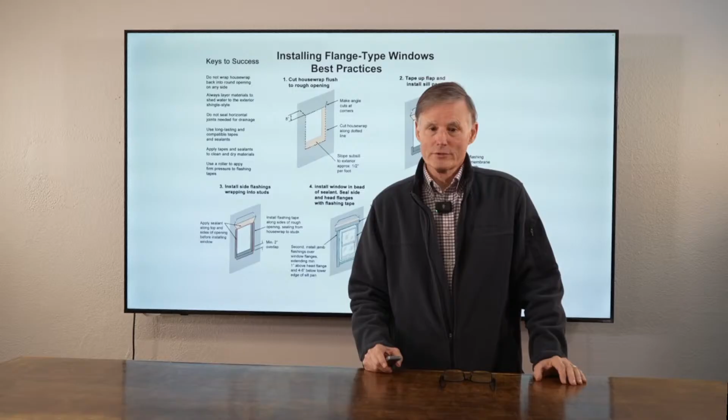This is a 5-step process for installing flange-type windows, which are the kind of windows you use when you have metal siding. The thing is, this is why it's good to go with a company that has lots of experience, because nobody likes leaky windows. If windows are not flashed properly, whenever you have vinyl and especially metal, they will leak when you get hard rains unless you flash it properly.

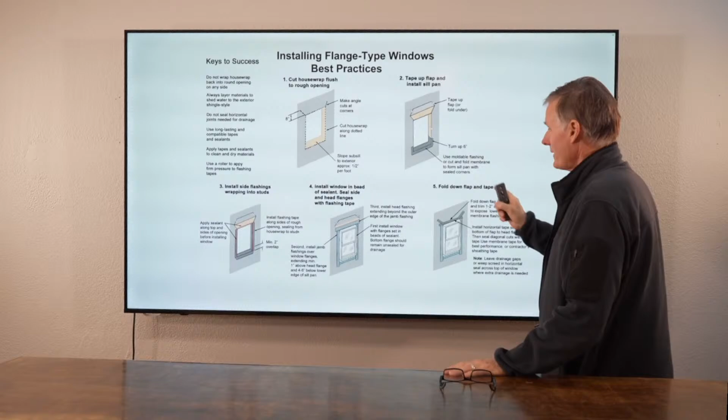So we follow - I'm not saying that we follow these 5 steps to the T, but we have a method that has been developed over years and years, and that's what we use. That's how we flash these windows. So that's the first one.

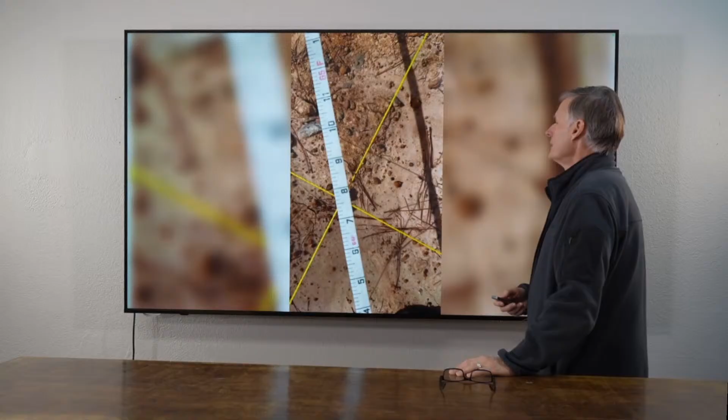What's that? Now here's the second one. What's that? You look at this photo and you see some string, and you see a measurement of 64 feet, 7.5 inches. Then you see the tape coming from another way, and it's 64 feet, 7.5 inches. So what is that?

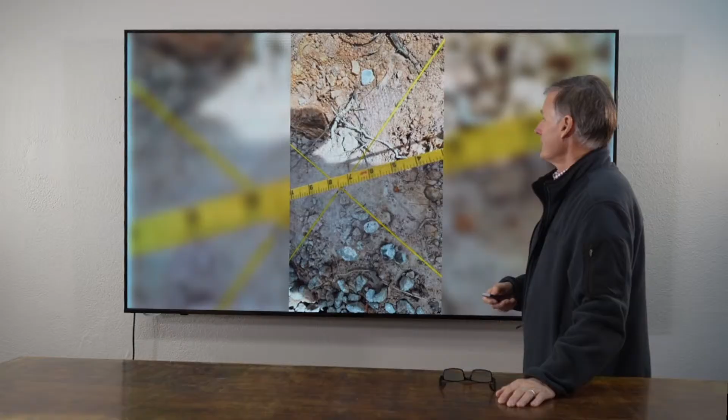Well, that is confirming the overall structure squareness. A lot of you guys that watch this program are very familiar with that, but if you're not - you have to get the building square. It has to be square, because if it's out of square, you will eventually see that in the construction process, particularly when we have our trusses spaced at 5 foot on center. If the building is out of square, that last truss is going to be crooked. It's going to show.

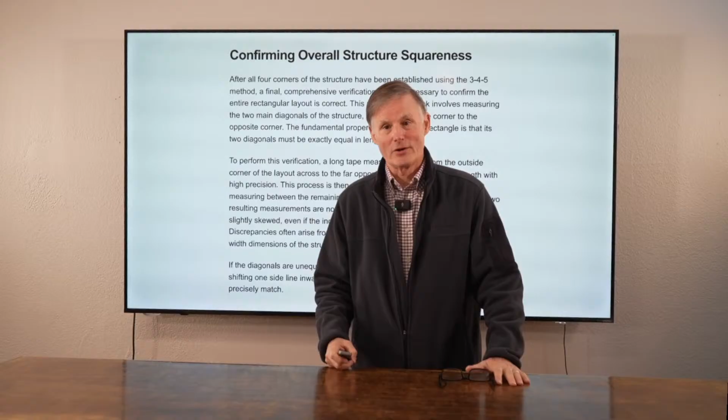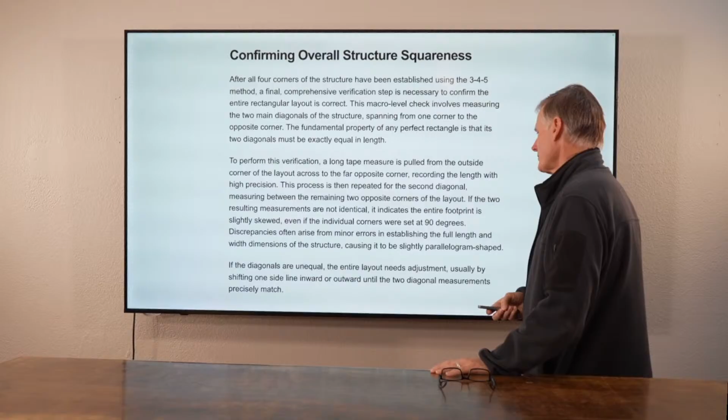So the way contractors have been doing this for a long, long time is using the 3-4-5 triangle, the Pythagorean theory, or the equal diagonals. I found this explanation: to perform this verification, a long tape measure is pulled from the outside corner of the layout across to the far opposite corner, recording the length with high precision. This process is then repeated for the second diagonal, measuring between the 2 remaining opposite corners of the layout. If the 2 resulting measurements are not identical, which these were, it indicates the entire footprint is slightly skewed, even if the individual corners were set at 90 degrees. Discrepancies often arise from minor errors in establishing the full length and width dimensions of the structure, causing it to be slightly parallelogram shaped. And so that's what that was.

Yeah, say that 3 times.

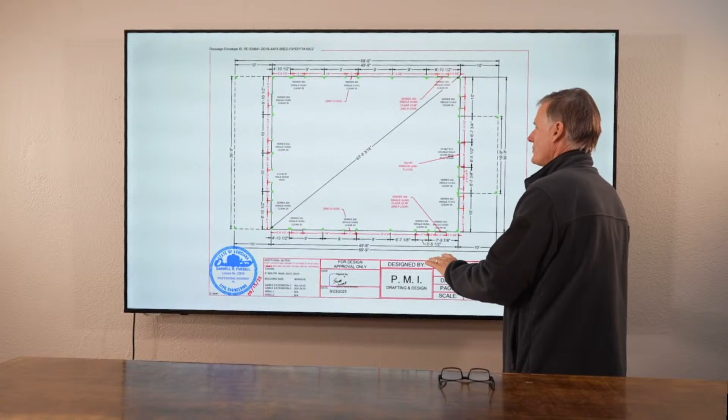Okay, so now let's look at a few of our projects. This project is for Mr. Scott Walter, and it was a 40 by 50 building. The reason I wanted you to see this was because it's a 40 by 50 by 16 building, okay? So the height is 16 feet. Well, he's got a second story up here, but he's only got 16 feet. So how does that work?

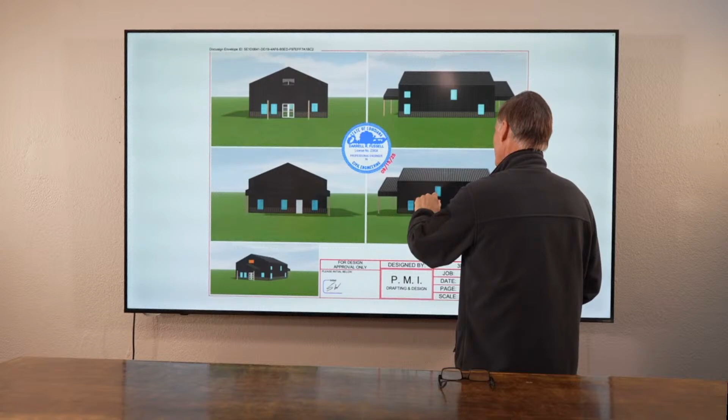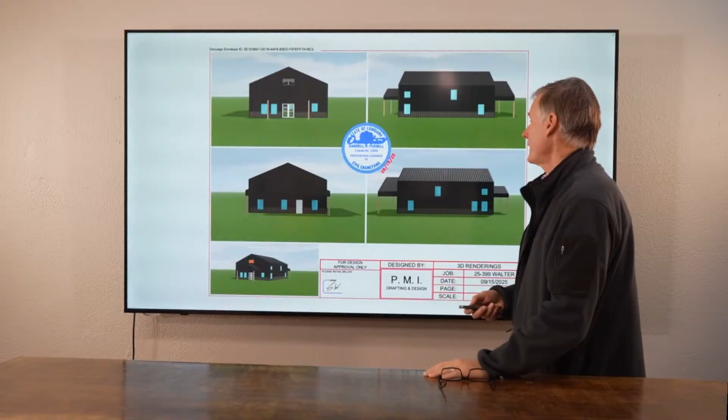Well, if you measure, so if this first floor is, say, 9 feet, and then the floor joists go up, that's another foot, so that's 10 feet. So that's only going to leave 6 feet right there on the second floor. But because of the trusses, the second floor would be a cathedral ceiling and you'd still have plenty of room. So that was a pretty good trick. He saved himself some money by going with a 16-foot building rather than an 18-foot or 20-foot, and it's still a great looking building.